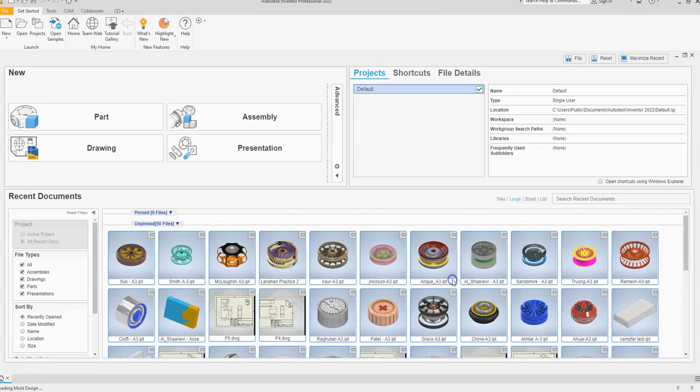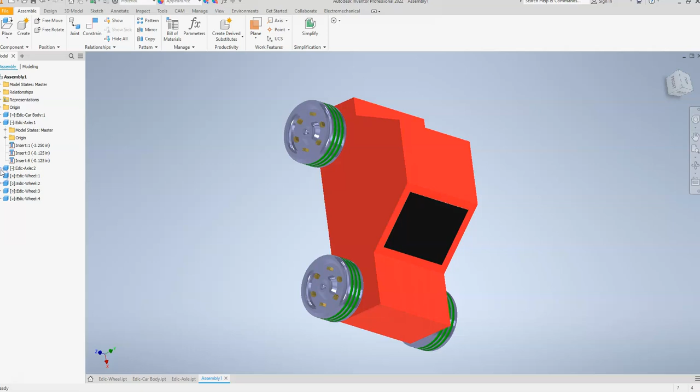Now I'm going to have multiple files open because we're going to create an assembly. You should have already done that, even though it was really basic, but we're going to work on creating our own car. If I bring this into view, this is just a very basic assembly I've created. You can see I have my wheels, two axles—I'm minimizing these so you can see them in the tree all together—and then I have my car body.

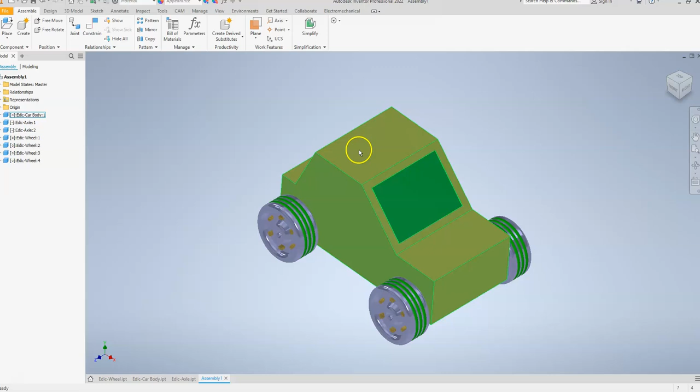So you're going to work on creating a car of your own. It can't be just a block, but you can add headlights—I added a windshield, I'll probably fillet these and add in other details—but I want to show you the basics of this before we go.

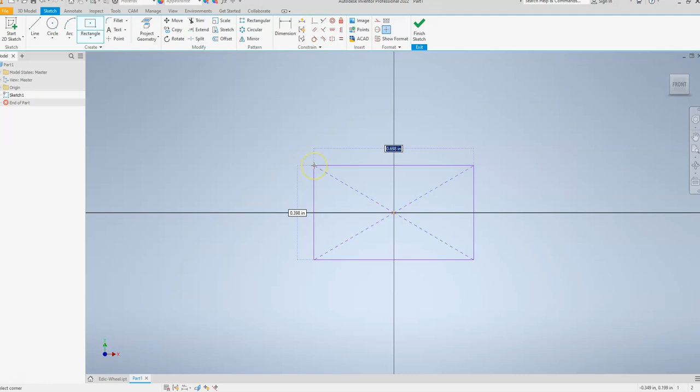So I started with—we've already created our wheels. Then I'm just going to go File, New, and start with the standard part. I'm going to start with, and I'm just kind of making up numbers, a 6x3 rectangle—6 inches by 3 inches—and that's going to be the basis of my car body. I'm going to say Finish, and extrude that 3 inches.

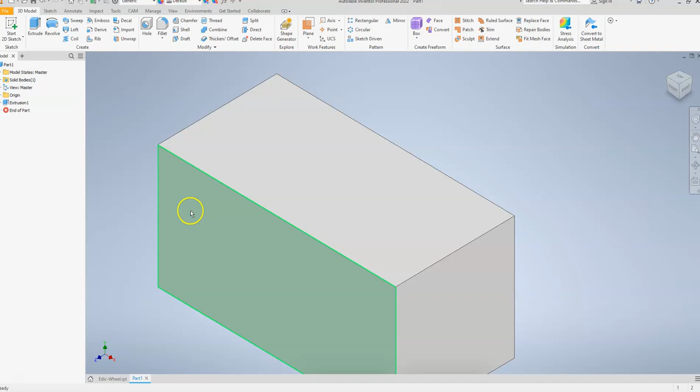Now this is your car—you can make it whatever you want, but I'm just showing you some basics. I'm going to start a new sketch on this surface. Say I want it to be flat for a little while, then come up at an angle—say tab 130. I'm just kind of making something so that way it looks the way I want it to look.

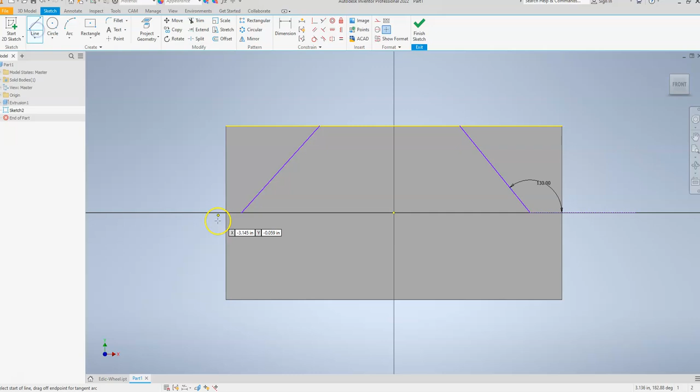I'll do the same thing from the back. I'm going to close in these shapes because I'm going to extrude them, removing that part of the material. Then I'll click Finish Sketch.

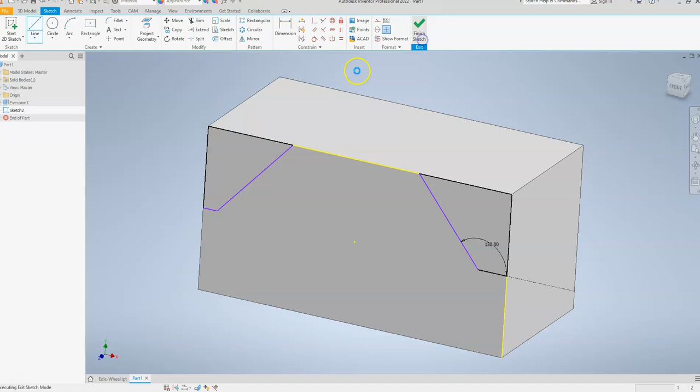Now I have this unconsumed sketch. I'm going to extrude this and this, but I want it to be cut through my whole car. And I'm going to press OK.

So I'm starting to get that general car shape. Look at different car shapes—you can look at toy cars, look at whatever you want so that way you can create something that you like.

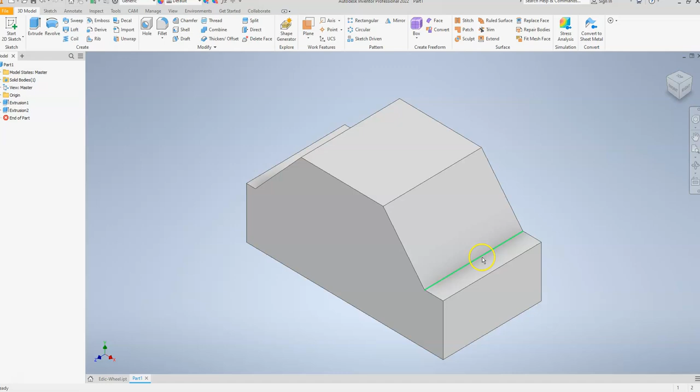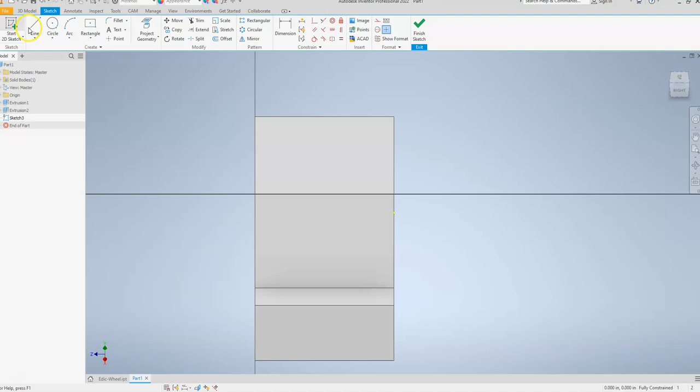I'm going to start a new sketch on this surface, and I'm going to use my center rectangle so that way I can snap to my midpoints fully. If not, I could draw a line in. So now I'm going to grab my rectangle, grab my midpoint, and I can draw in that windshield as I see fit. So I'm going to finish sketch.

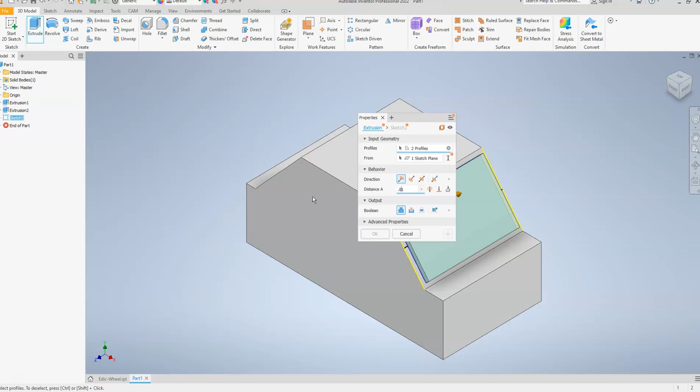And I'm going to give that just a little bit of thickness to it—I don't even want that much, just a little bit of thickness, because that's going to allow me to change my materials.

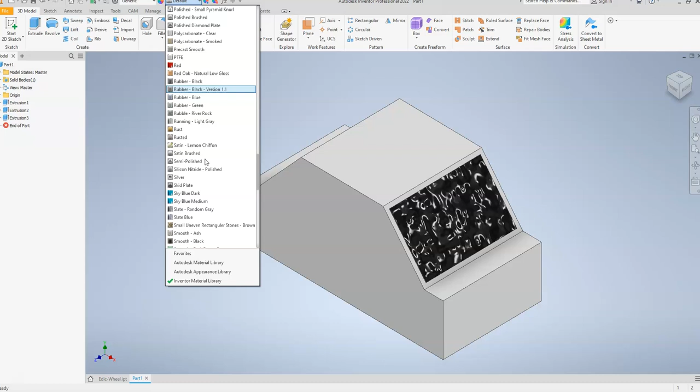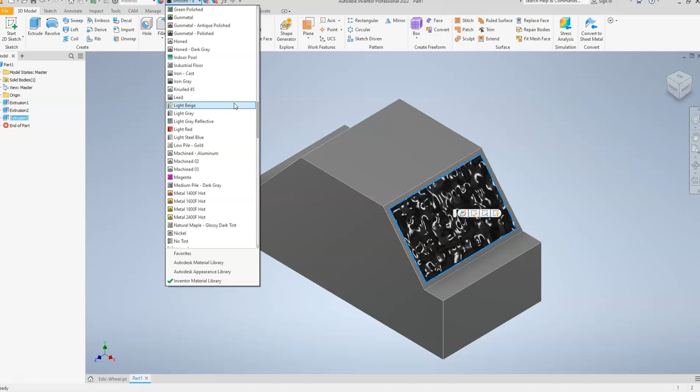So let's say I want it to be black, a little like that. You have to make sure you're selecting what you want. So let's do glossy black for the window.

And it's not changing—isn't that fun? So this happens sometimes. I think it's a problem with Inventor.

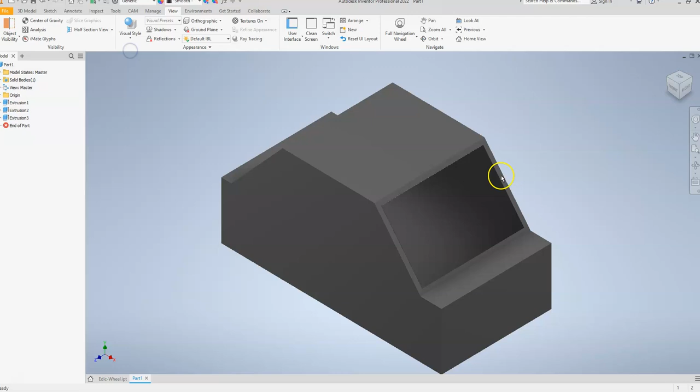Now if you see this, it looks really the same color. If I go into realistic, you can kind of see that's slightly different. I'm not going to use this color for my main car though.

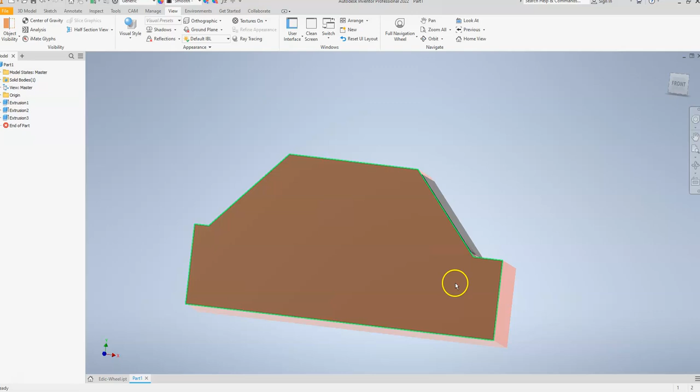Let's say I want it to be red. So I can choose by my extrusions, I can click on specific surfaces to make whatever it is that I want. I don't really like the nose of this, so I'm going to go back and edit it later, but I can add in all these other things.

So let's say I'm going to click on this surface, I want to start a sketch. Let's put in some headlights.

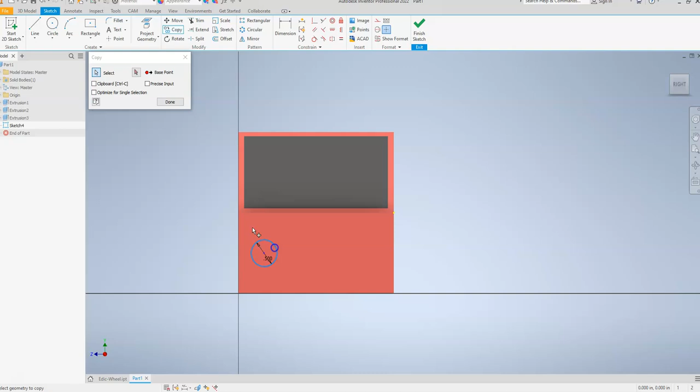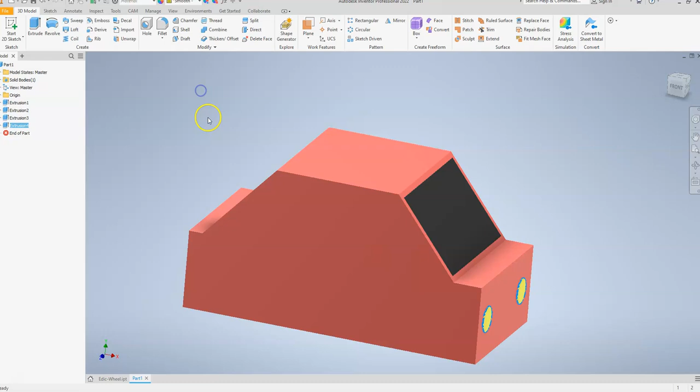And again, I can always go back and move and change different things. So I'm starting to get car-like. Something I do want to add in are where my axle holes go.

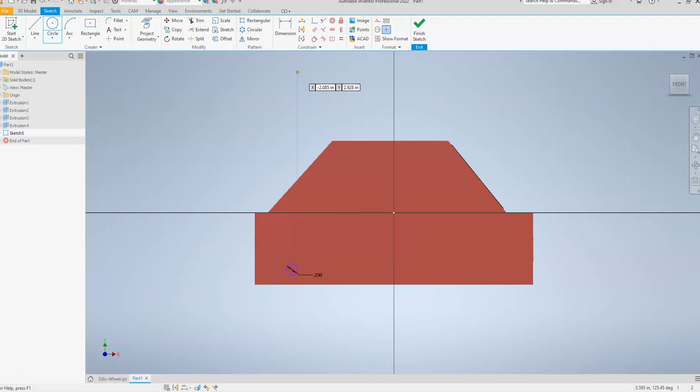This is dependent on the size of axle. I'm going to make my axles 0.25. If you think about this as being like a little toy car, do that same process.

Actually, drawing in Inventor is a lot like CAD, and you've done very complicated CAD drawings. It's just thinking about how you're breaking up that object.

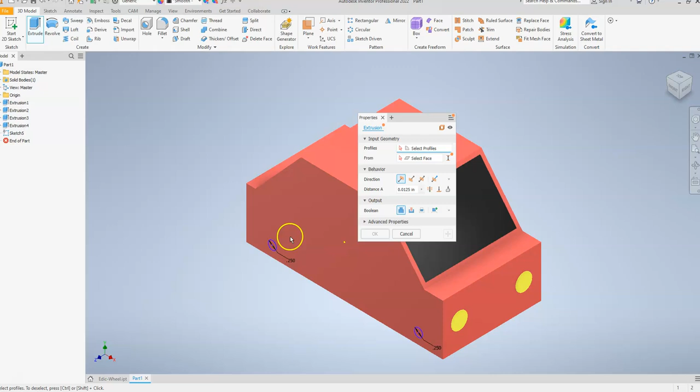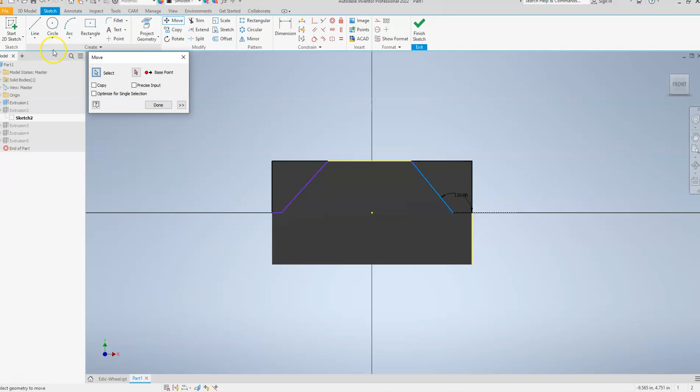So I'm going to edit my sketch because I don't really like this, I want this to be longer. So I'm going to select this, and I want to move it. So if you notice, I've changed some things.

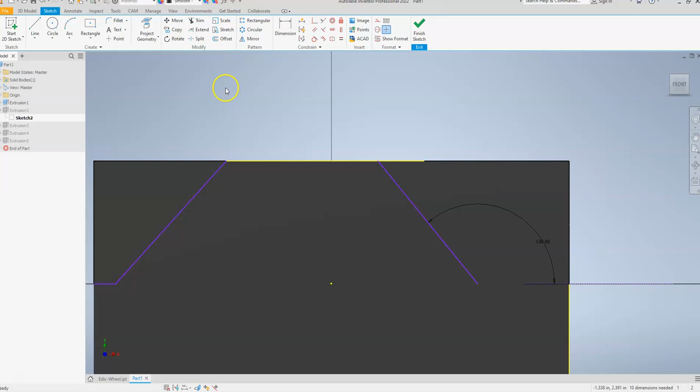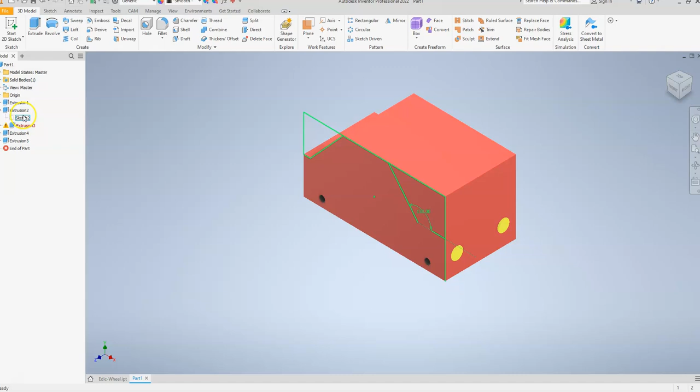I didn't close that in. So as you're working, it's okay if you have to go back and make changes, as you can see I am.

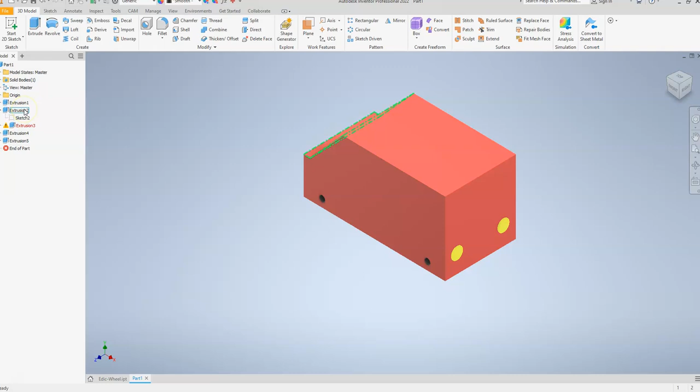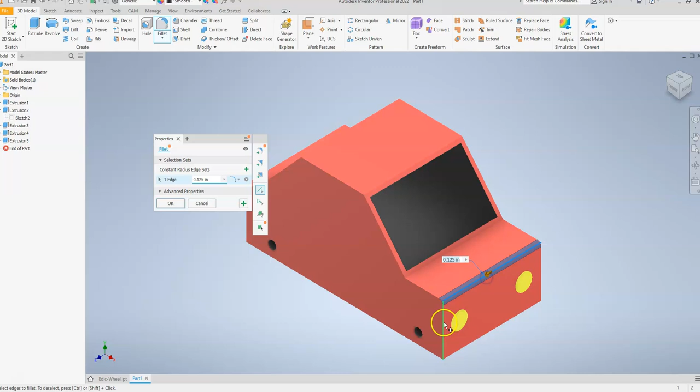Part of design is really figuring out what you want. Now see, I have that kind of longer front to my car, so I like that a little bit better. Maybe I want to fillet a nose, so make it a little bit more car-like.

There's lots of things to do. Make this what you want. Your car, you're designing it. So I'm going to go and save this.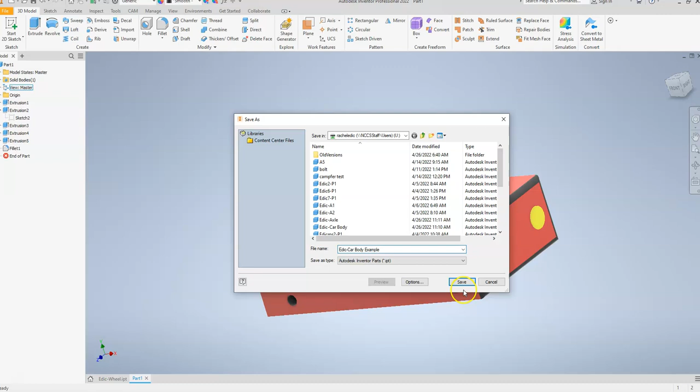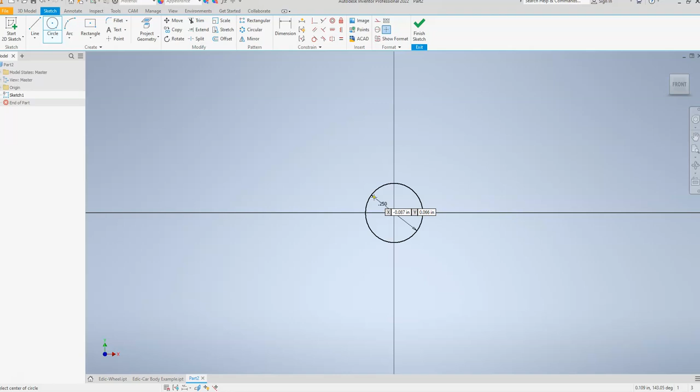I have to change up my naming because I use so many different files as examples, and I need one more new sketch. And you have to remember how big you made your car and your axle, so I know my axle is 0.25. I'm going to finish sketch.

I'm going to extrude it. My car was 3 inches wide. I'm going to make my axles 4 inches long, so that way I'm thinking about it has to stick out to hold my wheels on.

So let's go File, Save As, axle example. And I'm going to save that.

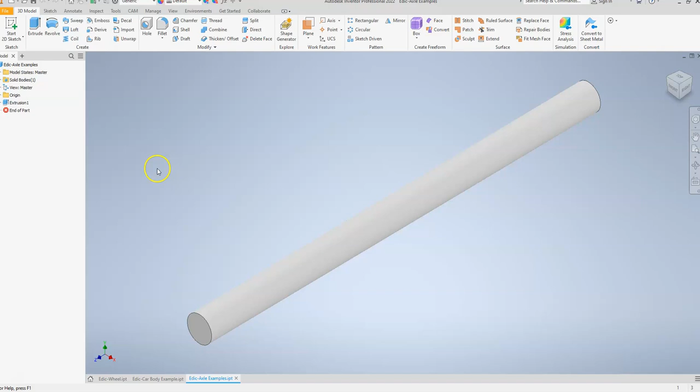Now I'm going to come in here and go New, and I'm going to create my standard assembly. This is where it's going to allow me to place all those different parts together.

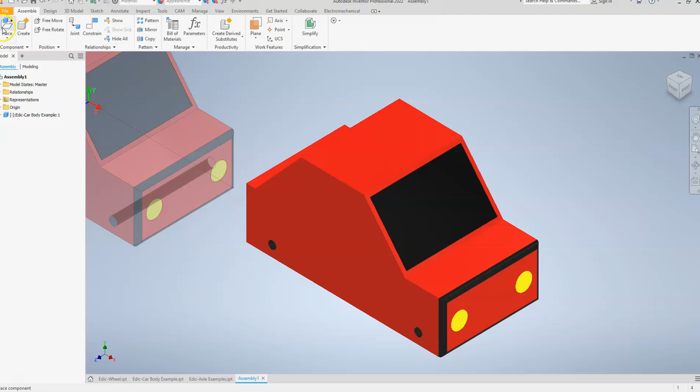One car. I want 2 axles and 4 wheels.

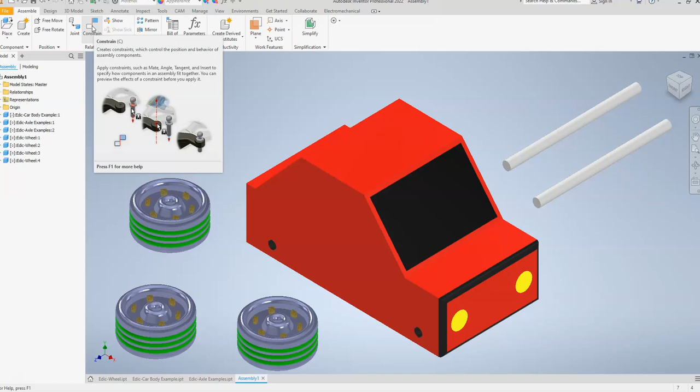Now we're going to use our constraints to constrain all of our parts together. So previously we used mostly mates, with mate, mate, and mate flush. For my axles and my car, I am going to use insert, but I have to offset it.

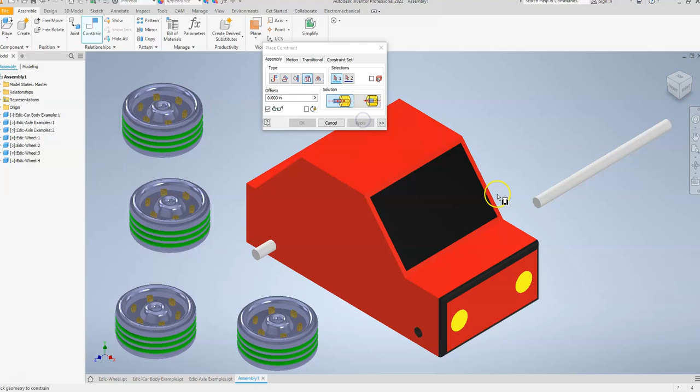So I'm going to offset it 3.5, and that was in the wrong direction, negative 3.5. Apply, so that way I can get my wheels to fit on my axles.

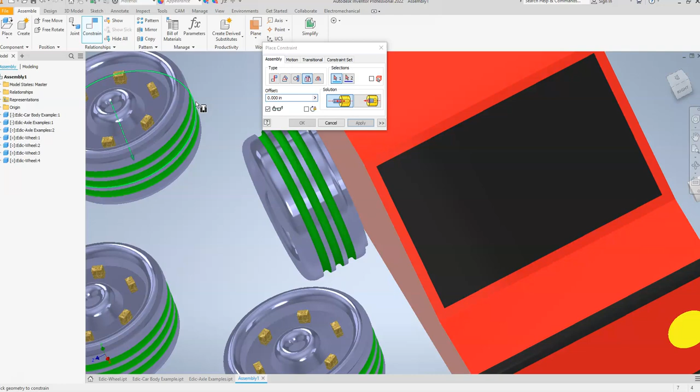I think I should be able to use that same thing. And again, I'm shifting around. There's a little bit too much room, so I'm going to offset it. Let's try negative 0.45. I don't want my wheel to interfere with my car.

See how there's a little bit of a gap in here? And I can see that my axle's in there, so I have that gap. My wheel shouldn't be inside the car. Those are 2 totally different parts.

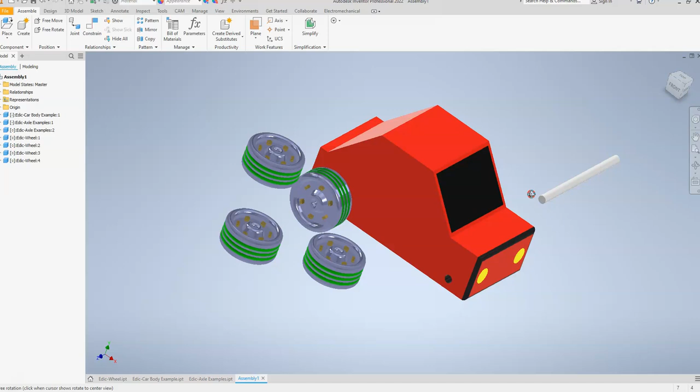So I'm just going to continue assembling my car. And again, there are lots of different ways to do this. Shifting around, making sure you can see what you're doing.

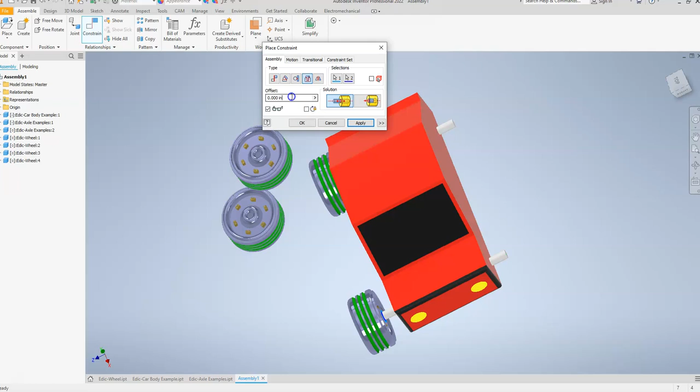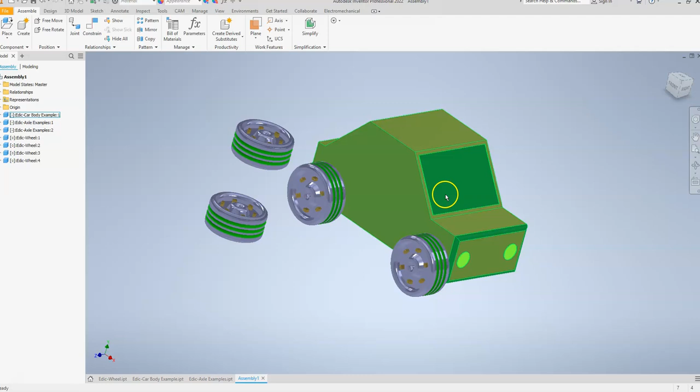So you're starting to get my aesthetic. You're going to create a car, a toy car, because it doesn't have to be quite as detailed as a real car, of your design, using the wheel you created. You're going to create that, and then don't forget that you're going to need to draw a part for your axles. Good luck, and let me know if you have any questions.